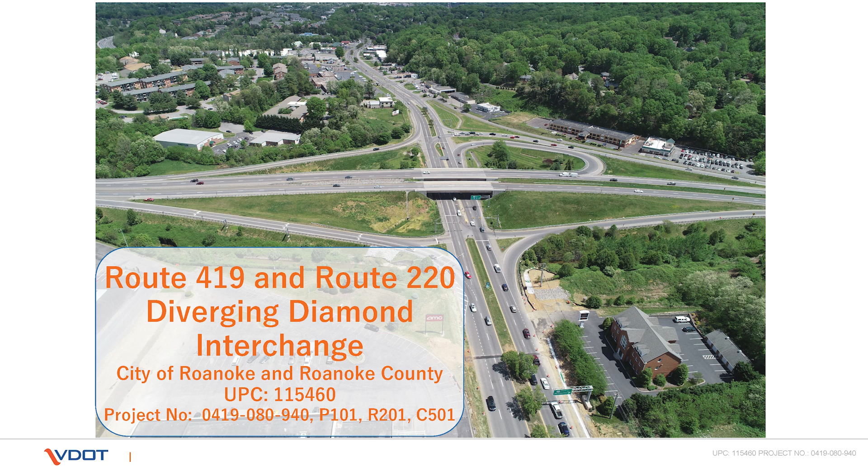Given the unique circumstances of the COVID-19 outbreak, along with our commitment to protecting public health during this national emergency, VDOT is conducting this virtual design public hearing to avoid in-person contact. This presentation will cover the same information that Salem District staff would have shared during an in-person hearing. However, the comment process will be different. Details on how to submit your comments and have your questions addressed will be covered later in this presentation. All project information can be found on VDOT's website.

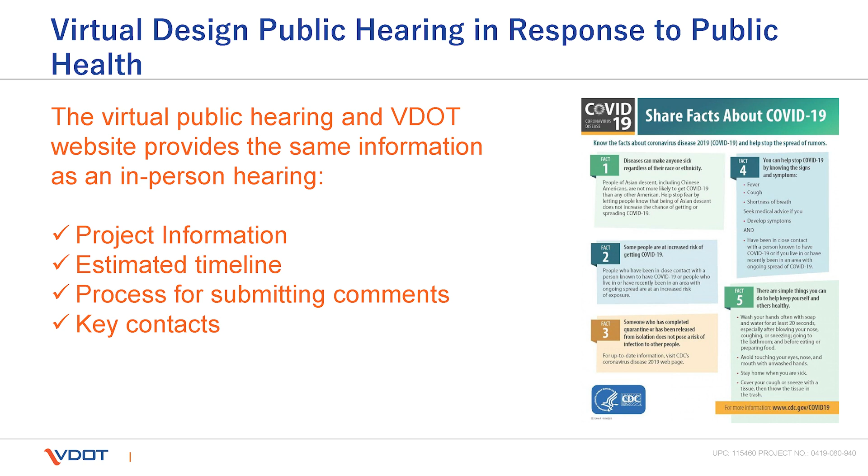Before we continue with the hearing, we want to review some guidelines so everyone can participate and get the most out of this hearing. Attendees will be muted throughout the duration of the hearing to minimize background noise and to ensure that all participants can hear. WebEx participants will have an opportunity to ask questions using the chat feature at the end of this presentation. When the chat feature is on, all WebEx participants will be able to see all messages.

We ask that only questions be written into the chat. The chat feature should not be used for any other type of commentary during the hearing. The moderator will read the questions aloud and they will be answered. Any individual who does not abide by our ground rules or who submits anything inappropriate will be removed from the meeting.

This public hearing is being held to receive and consider comments for the Route 419 and Route 220 Diverging Diamond Interchange project. You may have attended previous public hearings conducted by VDOT. However, for the benefit of those who have not attended one, we would like to explain why VDOT conducts a public hearing. A public hearing has four essential purposes.

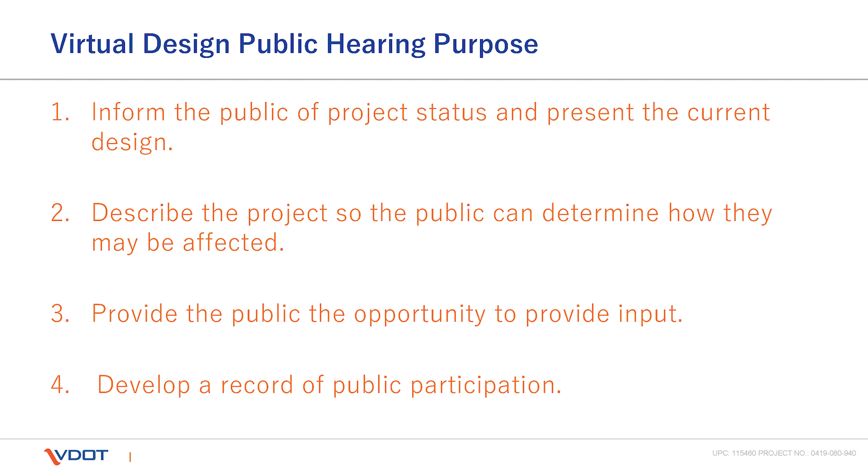First, to inform the public of project status and present the current preliminary design. Second, to describe the project, so citizens can see how they may be affected by the proposed improvements. Third, to provide the public an opportunity to see the proposed improvements and express their views prior to the design being finalized. Fourth, the hearing is also used to develop a record of official public comment to be included as part of the project documentation.

Your comments will be received in three ways. First, you may submit a comment using the email address listed on the screen, which is jesse.weizenfeld@vdot.virginia.gov. That's jesse.weizenfeld@vdot.virginia.gov. Please reference Route 419/220 DDI in the subject line.

Second, comments may also be mailed to the Virginia Department of Transportation, Attention: Jesse Weizenfeld, 731 Harrison Avenue, Salem, Virginia, 24153. Finally, an online comment form is available on the project website, listed on this slide. Comments must be received by July 9th, 2021, to be included as part of the official public hearing record.

While questions asked in the chat feature at the end of the hearing will be answered, these questions will not be included in the official public hearing record. So, if you would like your comments included in the hearing record, please use one of the three methods I just described.

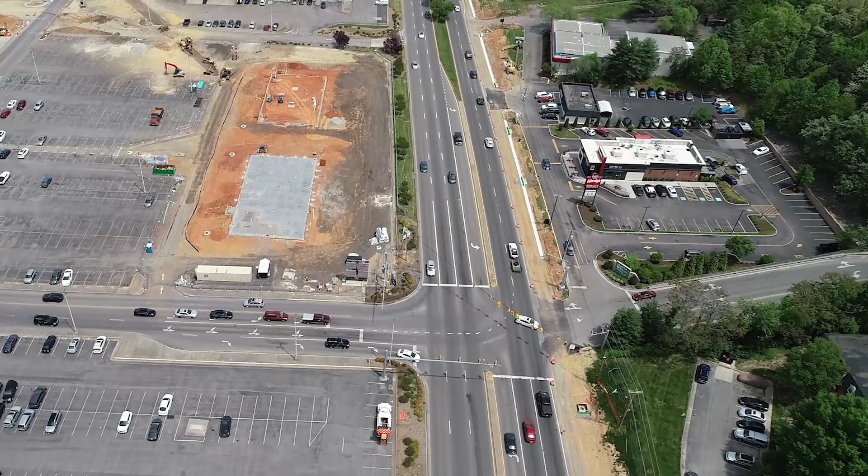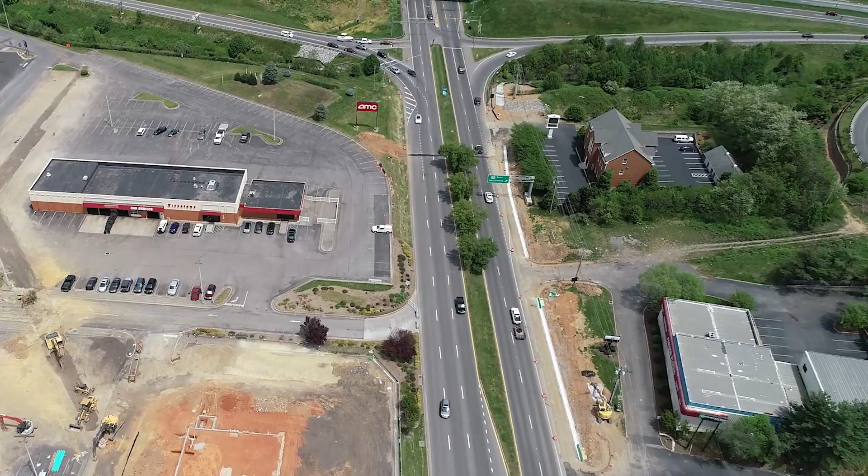Every day, tens of thousands of Roanoke area residents rely on Route 419 and US Route 220 to travel to work, school, and other activities. Route 419, also known as Electric Road, currently carries approximately 40,000 vehicles per day in this area, with Route 220 serving 52,000 vehicles per day. The Route 419 corridor and the Tanglewood Mall area have historically served as a commercial, social, and cultural center for the communities in southern Roanoke County and the city of Roanoke.

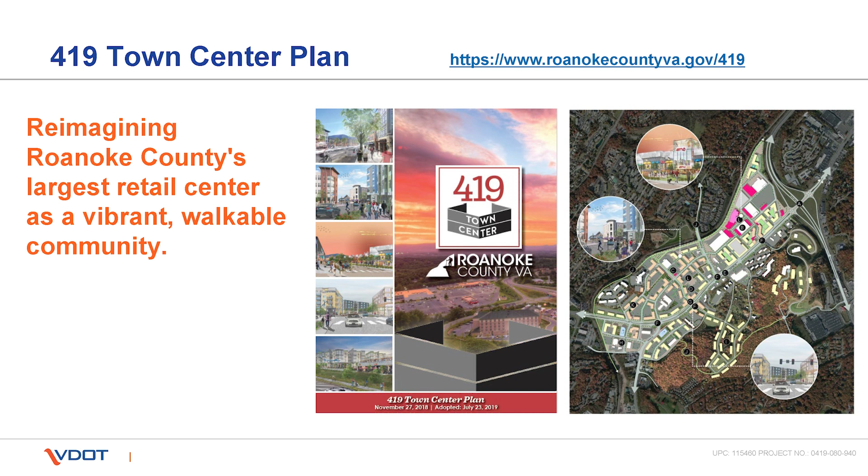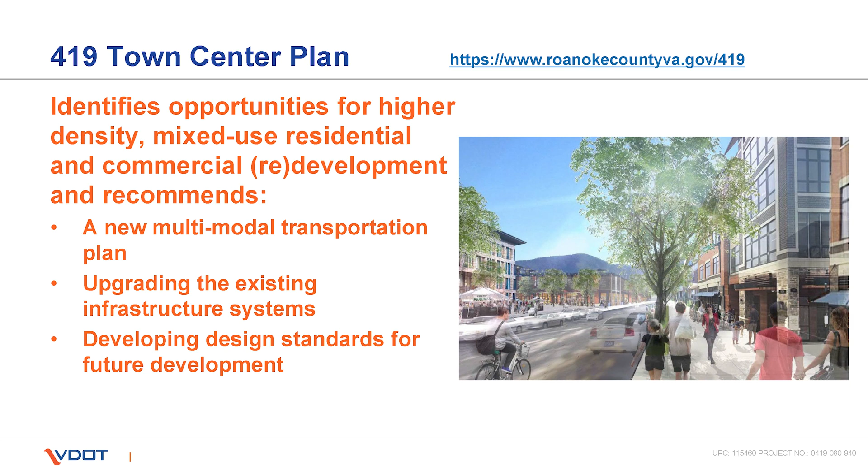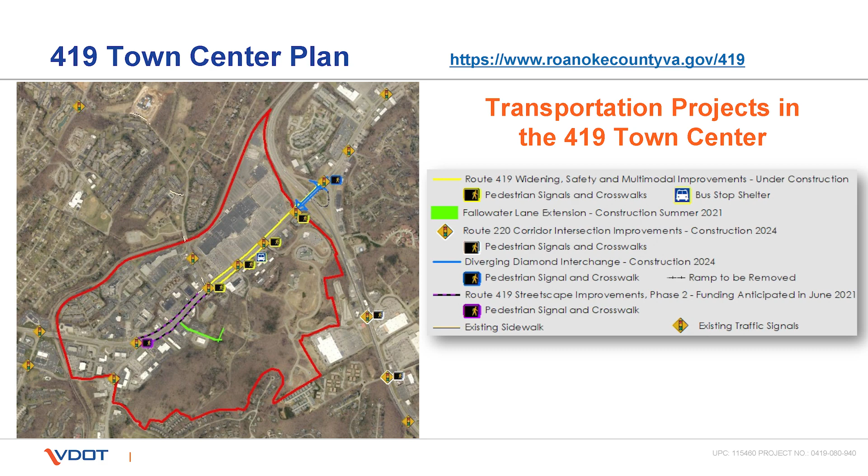County planners have completed a planning study called the 419 Town Center Plan, adopted by the Board of Supervisors in 2019 to set a foundation for reinventing this area by improving connectivity and walkability while supporting mixed-use redevelopment. Roadway improvements to enhance traffic flow and safety on the Route 419 corridor are just one component of the county's future vision. More information about Roanoke County's 419 Town Center Plan can be found on the county's website at roanokecountyva.gov/419.

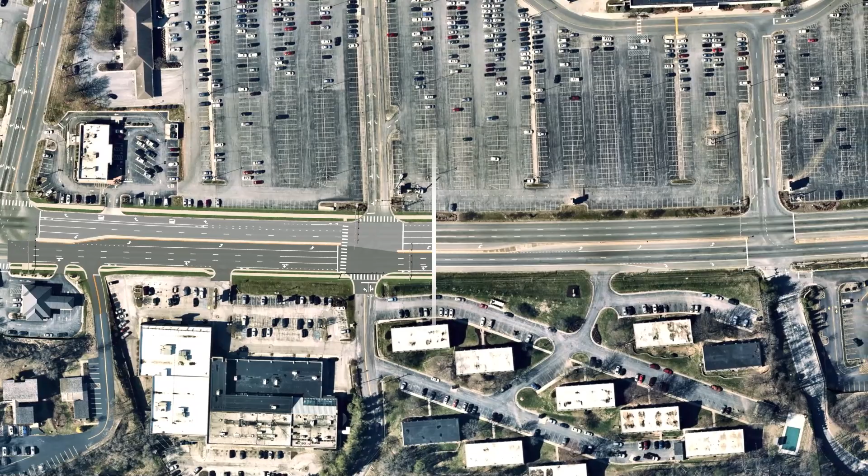Before we discuss the Route 419 and Route 220 Diverging Diamond Interchange project that is the focus of this public hearing, we want to briefly share some information about two other projects along the Route 419 and Route 220 corridors. VDOT, working closely with Roanoke County, is constructing a project to improve approximately 0.4 of a mile of Route 419 approaching the Route 220 interchange. This project, currently being built in front of Tanglewood Mall, will provide a third eastbound lane along Route 419, as well as sidewalks and bicycle lanes in the area in between Ogden Road and the ramps to Route 220. Work is anticipated to be completed later this year.

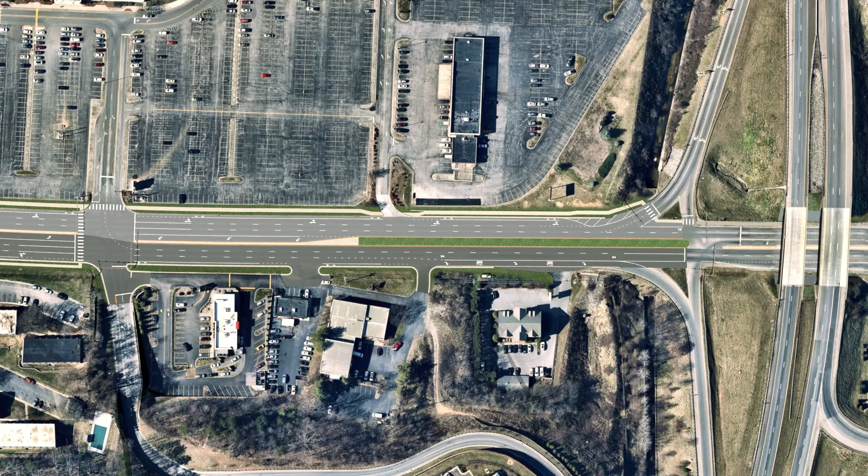Another project that VDOT has been developing is the Route 220 corridor intersection improvements. To achieve the maximum benefit from the future Diverging Diamond interchange at the junction of Route 419 and Route 220, improvements at the adjacent signalized intersections on both these corridors are needed. The Route 220 corridor intersection project will improve 7 signalized intersections along Route 220 between Roanoke and Martinsville, including 2 intersections in the city of Roanoke and Roanoke County at Valley Avenue and Southern Hills Drive, and at Crossbow Circle and Pheasant Ridge Road. This project is intended to reduce congestion and enhance traffic flow and safety through the interchange area and along the entire Route 220 corridor.

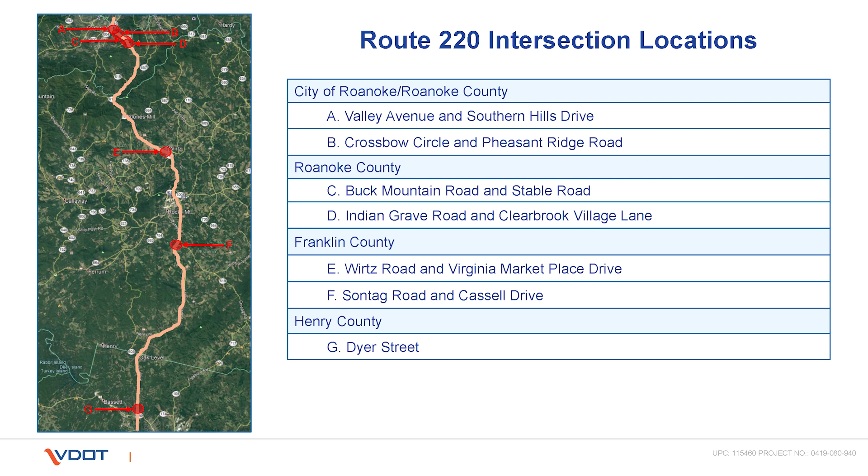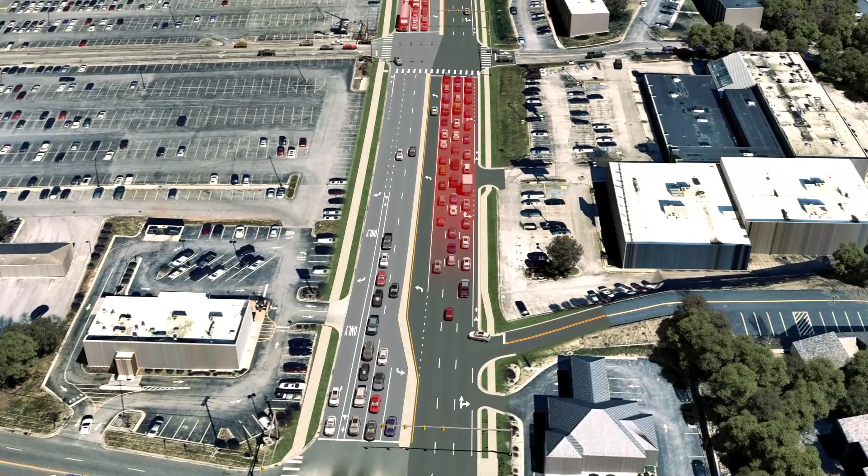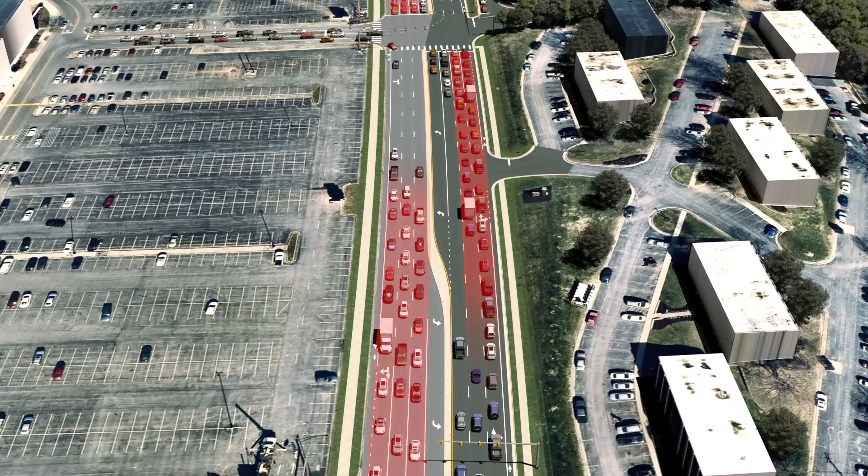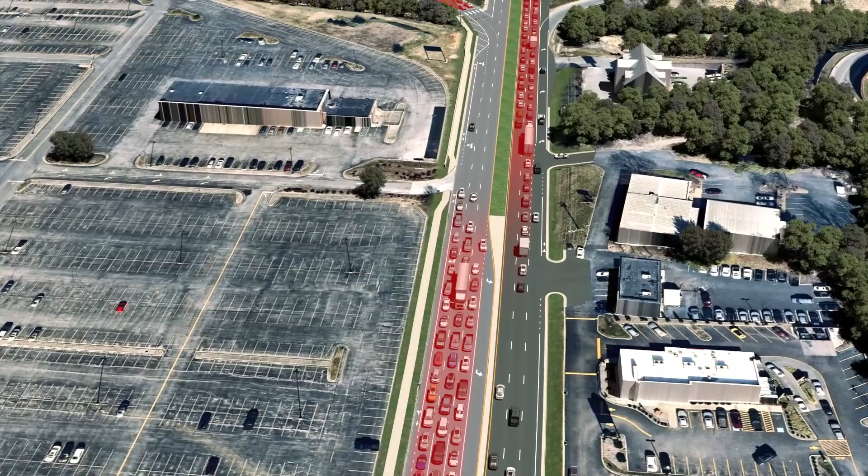A public hearing on the Route 220 corridor intersection improvements was held in April 2021, and construction is tentatively scheduled to begin in 2024. Now we will discuss the project background, project purpose, and details of the proposed Diverging Diamond interchange improvements at the junction of Route 419 and Route 220. Even with the construction project underway on Route 419 in front of Tanglewood Mall, additional improvements are needed to serve current and future traffic demands. The extensive delays and congestion that occur along Route 419 during the peak hours will worsen in the future without improvements. There are particular challenges at the signalized intersections of Route 419 and South Peak Boulevard. Also, the Route 419 and Route 220 interchange will continue to experience congestion with traffic backing up the ramps onto Route 220, particularly during peak travel times.

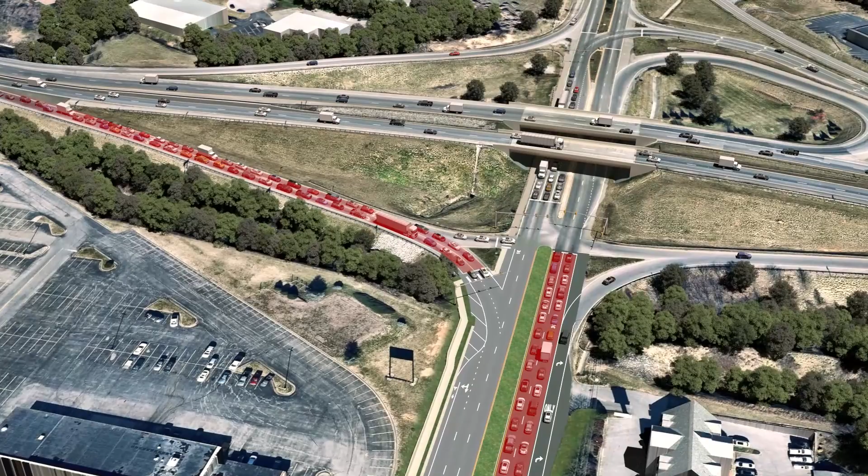To address these issues, improvements to the Route 419 and Route 220 interchange were initially recommended in 2017 as part of the 419 Town Center Plan community engagement. The plan was adopted by the Roanoke County Board of Supervisors in 2019. Reconfiguring the interchange at Route 419 and Route 220 as a Diverging Diamond Interchange, or DDI, was identified as the best solution to reduce congestion and improve traffic flow. There are several benefits of the DDI design, such as improved safety. DDIs reduce the number of points where vehicles may cross paths, which decreases the potential for crashes.

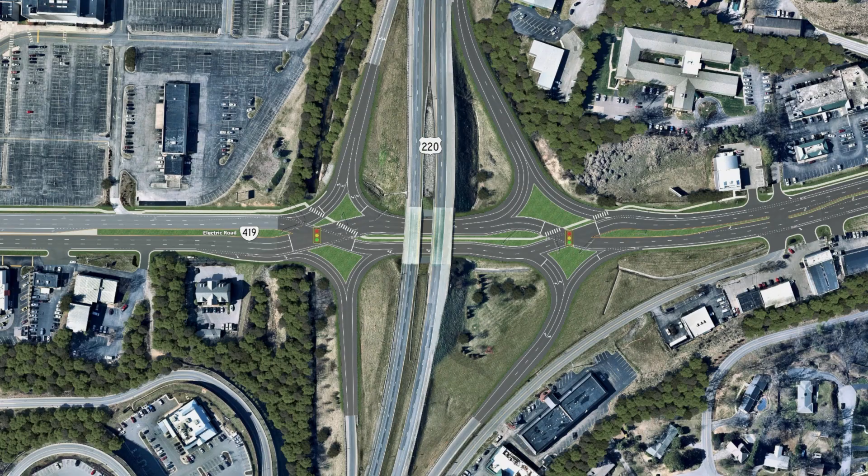Increased efficiency. The crossover intersections at a DDI operate with fewer traffic signal phases, which allows the interchange to handle a greater volume of traffic, operate with less delay than conventional interchange types, and better accommodate pedestrian traffic. Reduced footprint. The proposed DDI configuration requires less space than other interchange configurations, reducing right-of-way needs and impacts to adjacent properties. Motorists who use the I-581 interchange at Valley View Mall in Roanoke will be familiar with the Diverging Diamond concept and its benefits. The diverging diamond interchange would consist of two signalized intersections where Route 419 traffic temporarily crosses to the opposite side of the road. Drivers simply follow their lanes and the traffic signals to complete these crossover movements. Signs and pavement markings will help drivers remain in the correct lane as they travel.

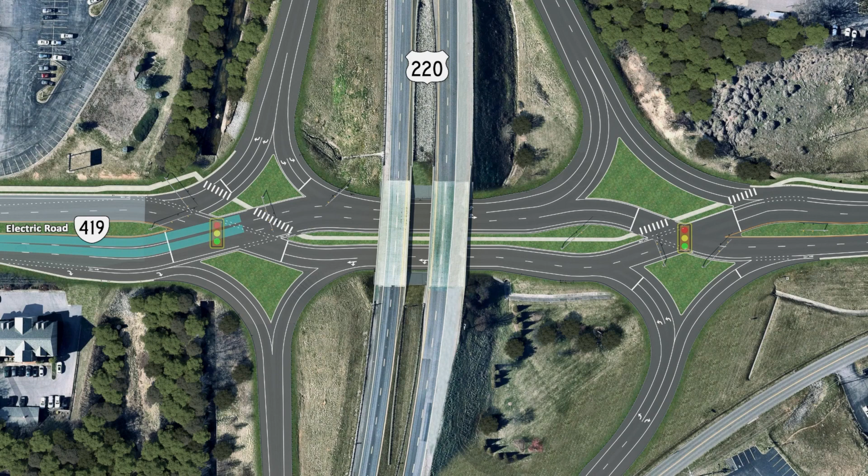So, how would the new interchange function at Route 419 and Route 220? For this discussion, Route 419 is assumed to run east-west, and Route 220 is assumed to run north-south. Approaching from the west, Tanglewood Mall area, along Route 419: traffic destined for Route 220 south towards Rocky Mount would turn right, very similar to how this movement occurs today. Traffic destined for Route 220 northbound towards downtown Roanoke or I-581 would travel through the first crossover intersection onto the opposite side of the road and then exit to the left onto the ramp to Route 220 northbound.

Traffic could access this ramp from either the left or center lanes along Route 419. Traffic continuing along Route 419 would pass through both crossover intersections as shown. If you are traveling to Route 220, the DDI configuration makes it simple to know which lanes to use. If you are turning right, stay in the right lane. If you are turning left, use the left lanes.

Approaching from the east along Electric Road. Traffic destined for Route 220 north towards downtown Roanoke or I-581 would turn right, very similar to how this movement occurs today. Traffic destined for Route 220 southbound towards Rocky Mount would travel through the first crossover intersection and then exit to the left onto the ramp to Route 220 southbound. Traffic would access this ramp from the left lane along Electric Road. Traffic continuing along Route 419 would pass through both crossover intersections as shown.

Southbound traffic approaching from Roanoke along Route 220. Traffic destined for westbound Electric Road towards Tanglewood Mall and Salem will turn right from the dual right turn lanes. This is similar to how the movement is made today. Traffic destined for eastbound Electric Road and Franklin Road towards the city of Roanoke will bear to the left as they proceed down the off-ramp. From there, they will enter Electric Road and pass through the crossover intersection.

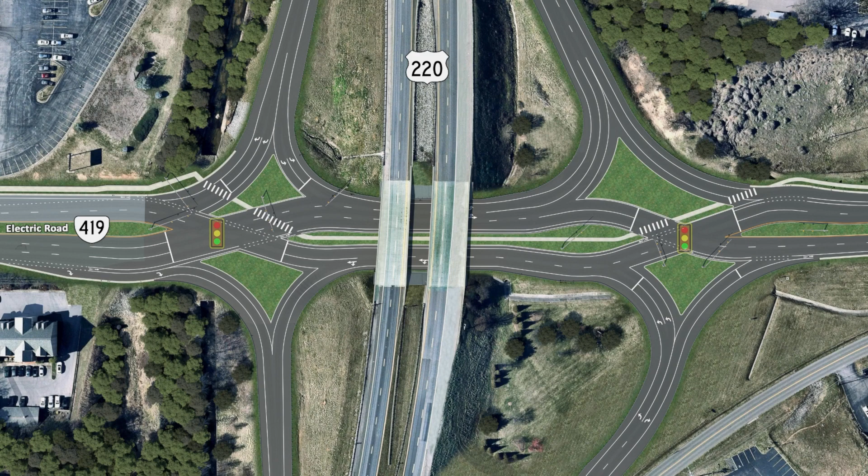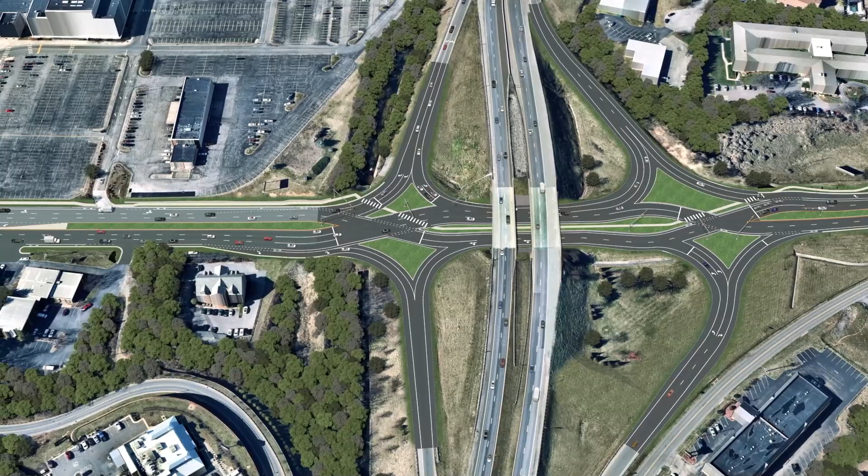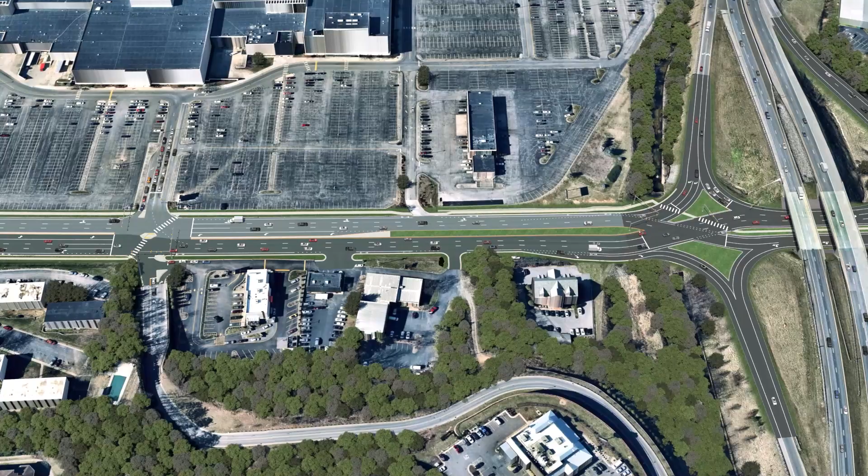While the proposed reconfiguration of the interchange as a DDI will provide safety and operational benefits, additional improvements are needed along Electric Road. Currently, the interchange serves as the bottleneck or choke point along the corridor. Once the interchange is improved, more traffic will be able to pass through it during peak travel times, which would exceed the capacity of the adjacent intersections. The intersections at Ogden Road, Elmview Road, and South Peak Boulevard will need to be modified to operate more efficiently, or they will become the new bottlenecks after the DDI is constructed.

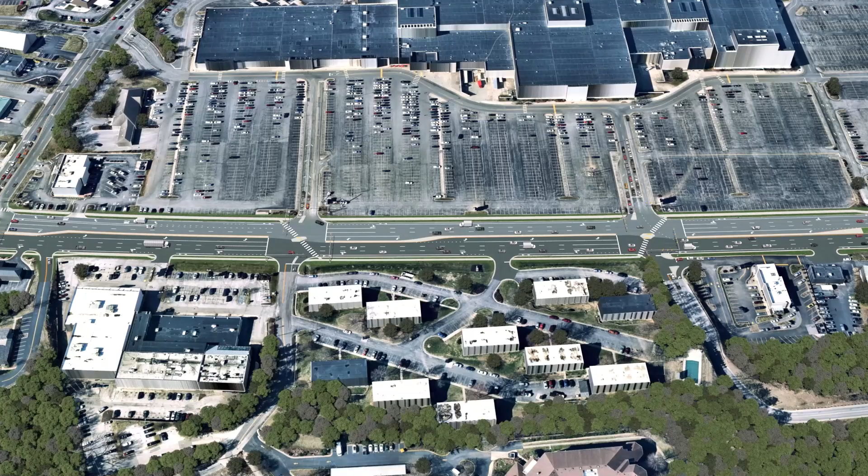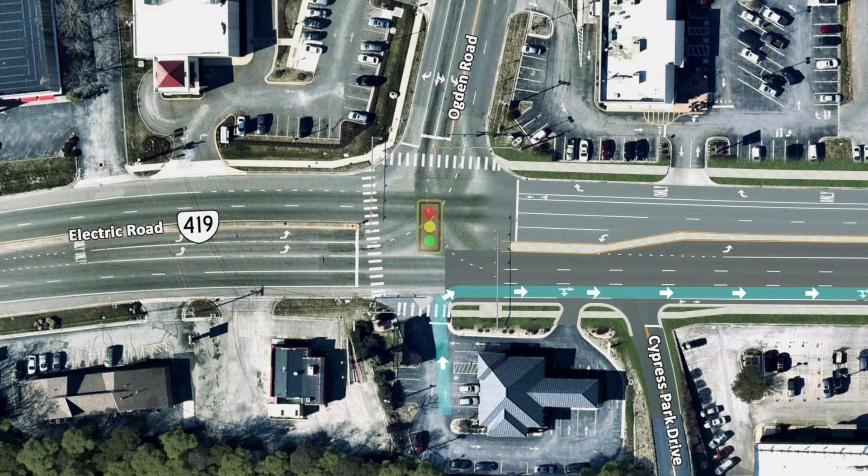At each location, certain low-volume traffic movements will be rerouted, allowing for a reduction in the number of phases at the signal and increasing green time for all other drivers. We will now discuss the modifications at the 3 signalized intersections along the Route 419 corridor. At Ogden Road, traffic exiting the bank from the main entrance will only be allowed to turn right onto Electric Road. Left turns and through movements from this parcel would turn right and then make a U-turn at the adjacent Elmview Road signal.

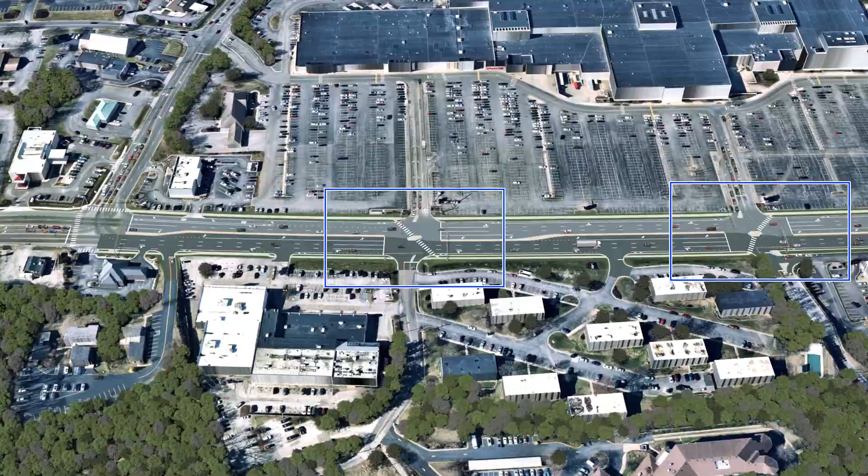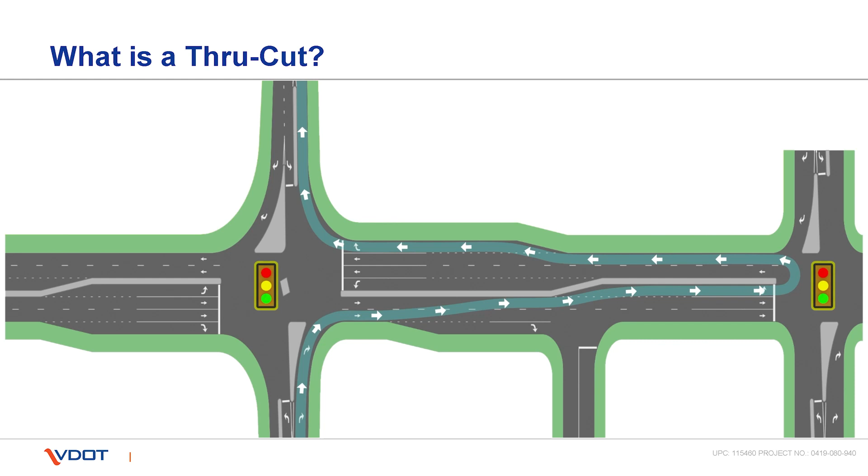At the intersection of Elmview Road and South Peak Boulevard, a thru-cut intersection is proposed. What exactly is a thru-cut? Basically, a thru-cut intersection implements a change for motorists who currently drive straight across Route 419 from a side street at signalized intersections. Instead of driving directly across Route 419, these drivers will turn left or right at the signal and can turn directly into businesses or use a nearby signal to make a U-turn to reach their destinations.

You might ask what's changing with the thru-cut improvements. The thru-cut only reroutes motorists who currently drive straight across Route 419 at a signal. Notably, this is less than 1% of all traffic that uses the intersections in this area. This change eliminates a signal phase. With fewer signal phases, more green time can be provided on Route 419. More green time means less delays for drivers.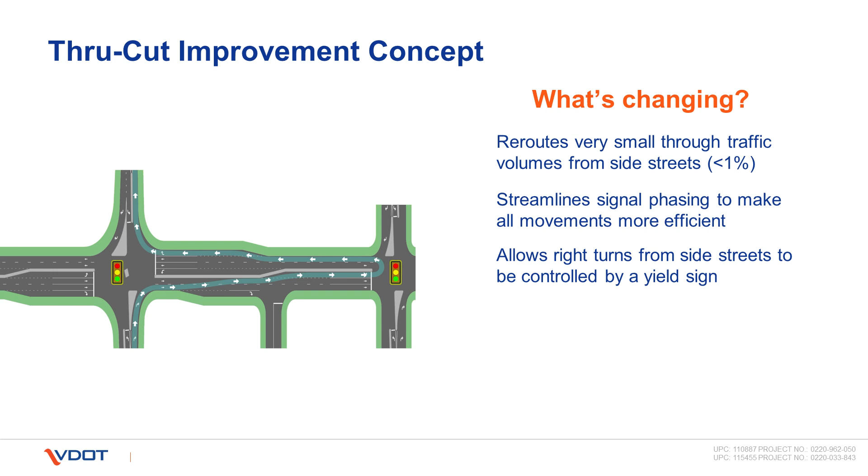In addition, yield signs will be installed to control right turns from the side streets. This will enable cars turning right to proceed whenever a gap in traffic becomes available. Finally, pedestrian accommodations will be provided as needed.

So, what's staying the same? No traffic signals are being removed. Also, drivers can still turn left and right from side streets onto Route 419. And Route 419 motorists can still turn onto side streets or drive eastbound or westbound on Route 419 as they do today.

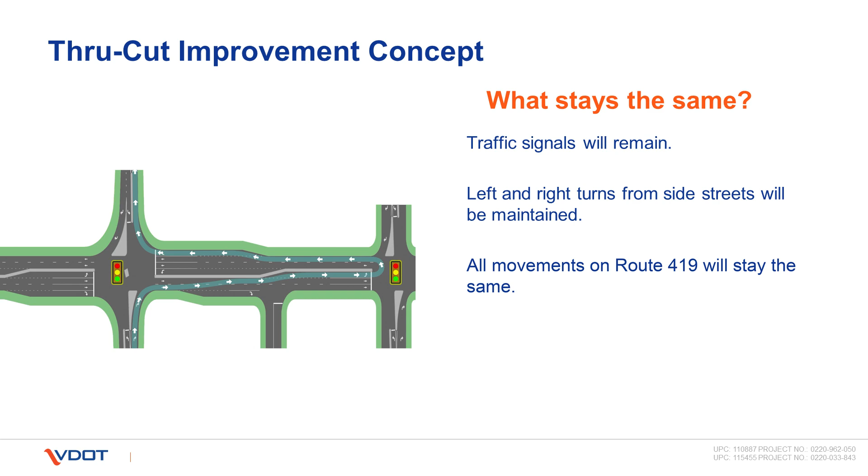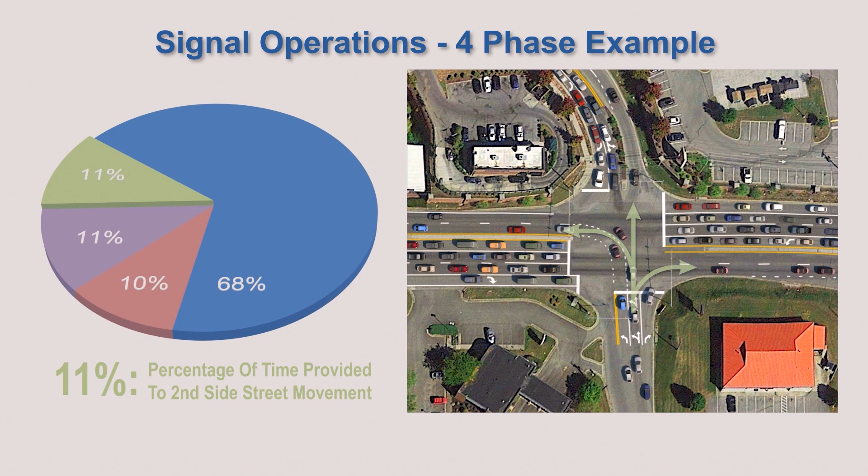This sequence of graphics shows how time is divided between the various signal phases for a typical intersection on a busy corridor. A signal phase serves a movement or group of movements which are allowed to enter the intersection at the same time. Next, you can see how time is divided between the various signal phases with a thru-cut in place. By only requiring 3 signal phases at most intersections, more green time can be provided to higher volume movements at the intersection.

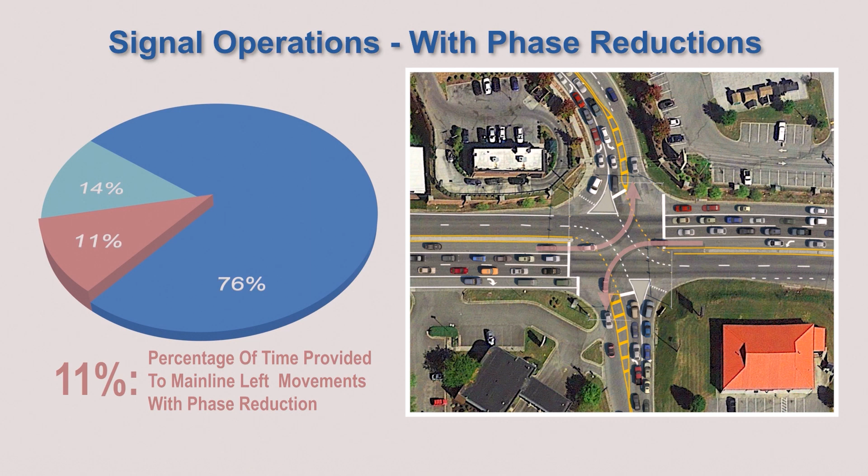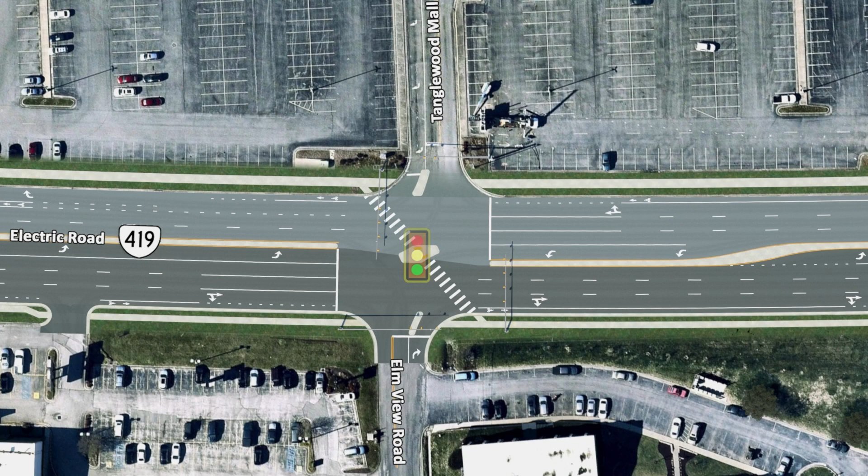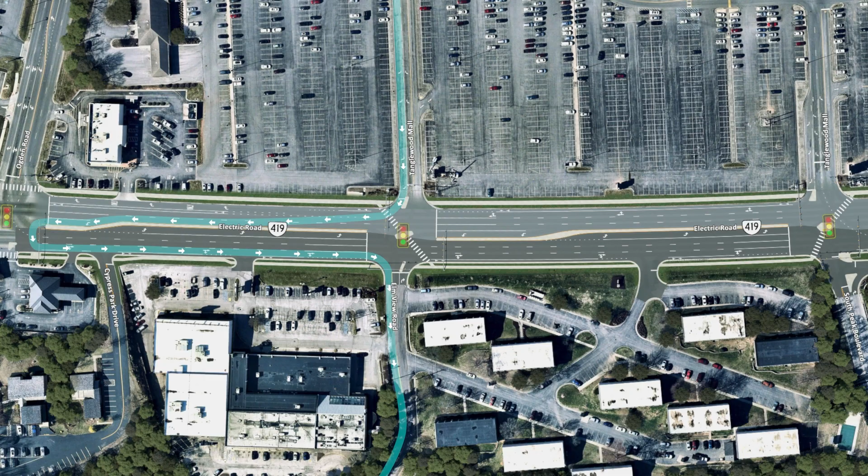At Elm View Road, a thru-cut intersection is proposed. The low-volume through movements from the side streets, in this case Elm View Road and one of the exits from Tanglewood Mall, would be rerouted. To access the mall from Elm View Road, traffic could turn right and then make a left into Tanglewood Mall at the signal at South Peak Boulevard. To access Elm View Road from the mall, traffic could turn right and make a U-turn at Ogden Road or exit the mall opposite South Peak Boulevard and turn left onto Elm View Road.

At South Peak Boulevard, a modified thru-cut is proposed. Traffic wishing to go straight across Electric Road from South Peak Boulevard could turn left and then make a right into Tanglewood Mall at the signal at Elm View Road. Traffic wishing to go straight across Electric Road from Tanglewood Mall could turn right and make a U-turn at Elm View Road or exit the mall opposite Elm View Road and turn right onto South Peak Boulevard. Left and right turns from Tanglewood Mall would be allowed.

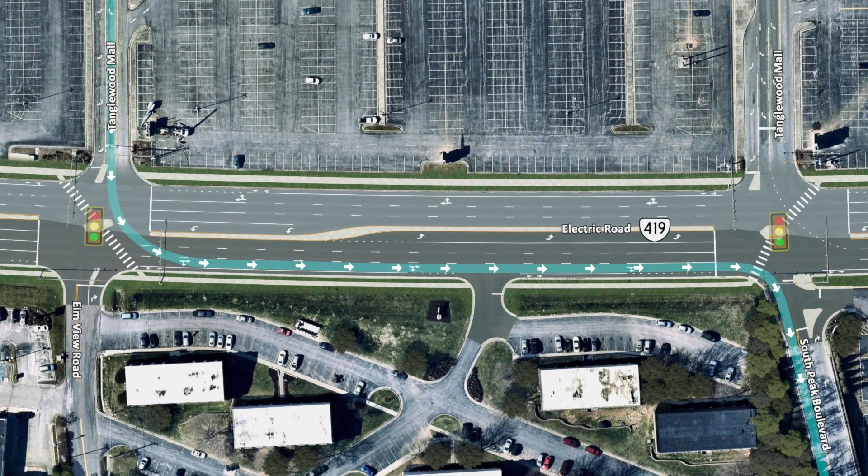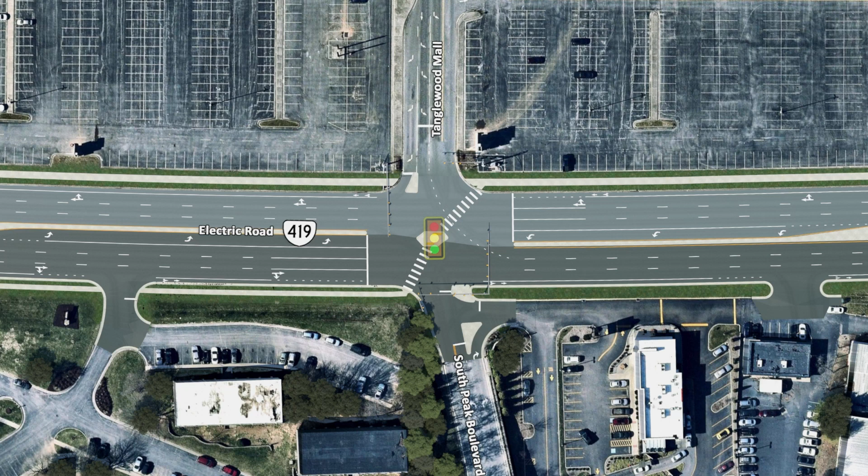Along South Peak Boulevard, left turns would be allowed onto Electric Road. Traffic from South Peak Boulevard destined for Electric Road and the Route 220 interchange would no longer be able to turn right at the traffic light. Other options are available to make this movement, such as accessing Route 220 from South Peak Boulevard and Valley Avenue. Vehicles would still be able to turn into and out of Wendy's from South Peak Boulevard and Electric Road. The graphics show how the traffic signal at this intersection would operate.

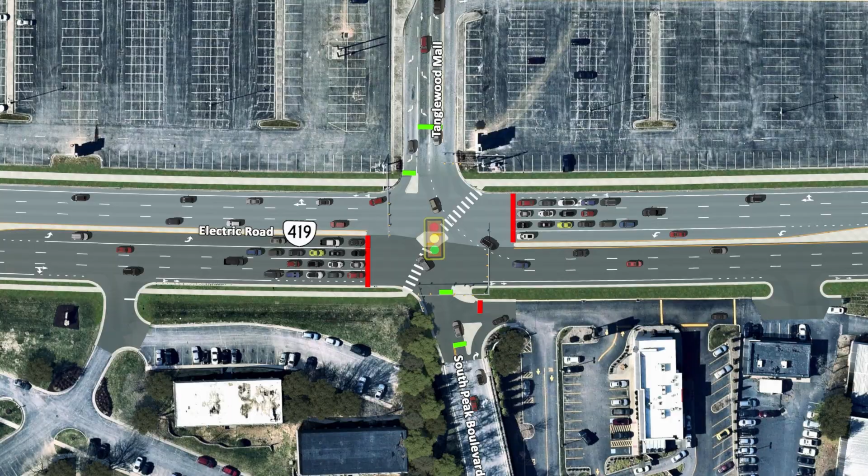The proposed intersection improvements on Route 419, in conjunction with the DDI, will improve the traffic flow and mobility on the entire corridor and provide other benefits. Drivers will experience shorter wait times due to fewer signal phases. Safety is also enhanced because the number of rear-end collisions is reduced by decreasing stop-and-go traffic. Crashes may be reduced by as much as 15 to 20%.

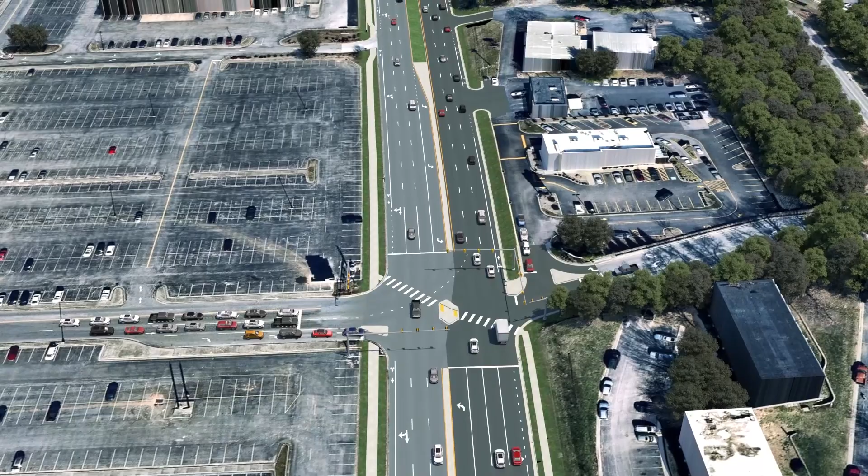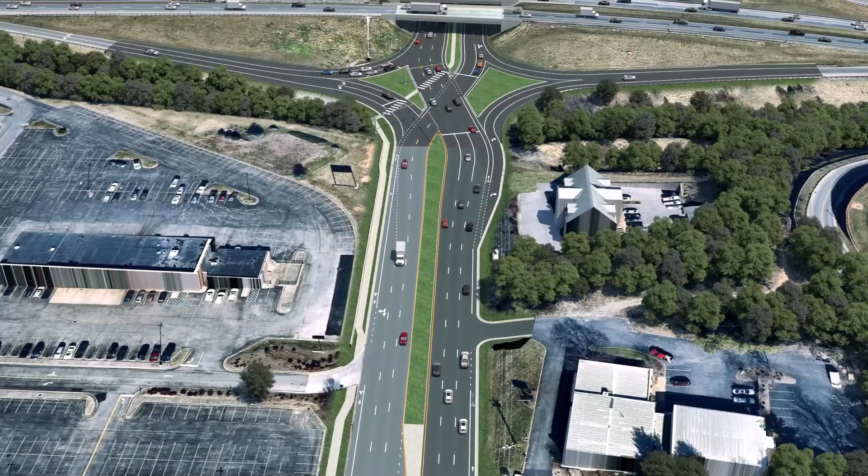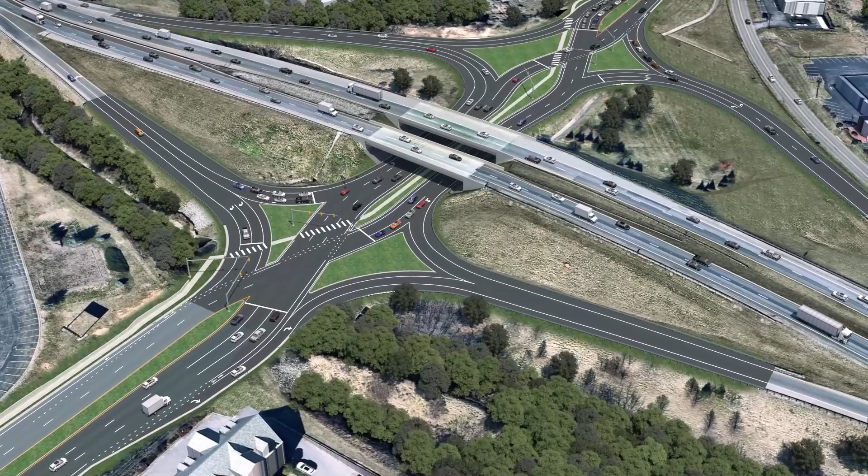The thru-cut design also improves the corridor at a cost that is significantly less than traditional widening. In addition, these improvements would provide opportunities to enhance pedestrian safety by adding new crosswalks and other features at some locations. Without these improvements, traffic congestion is expected to constrain future growth and travel along Route 419 and Route 220.

Now let's discuss the project schedule. Preliminary engineering is underway. After the public hearing, we will receive comments until July 9th, 2021. VDOT expects to begin acquiring the necessary right-of-way and easements for this project in early 2023. In early 2024, the project will be advertised for contractors to submit bids for construction.

Once bids have been received and the lowest qualified bidder is identified, construction is tentatively expected to begin in mid-2024 and be completed in late 2026. The total anticipated cost for this project is $17.5 million. This includes preliminary engineering, right-of-way, and construction costs.

This project is funded with federal and state funds. During construction, there will be impacts to traffic, but we're working to minimize the disruptions as much as possible. 2 lanes of traffic in each direction will be maintained during peak traffic hours throughout the duration of the project.

Drivers can expect temporary lane closures outside of peak travel times, as well as the potential for narrowed travel lanes, lane shifts, and shoulder closures. Turning movements may be redirected at times during construction, but access to businesses will still be available.

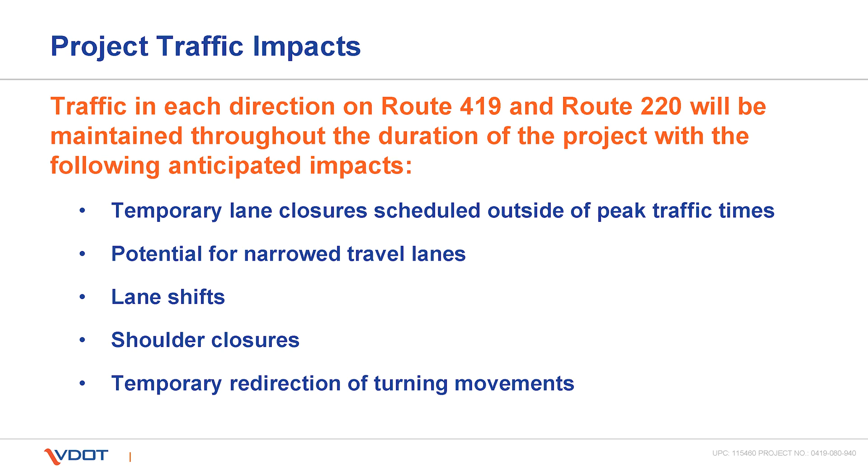This project has been evaluated for potential environmental impacts in accordance with the National Environmental Policy Act of 1969. The NEPA Act is an umbrella encompassing a variety of legislation passed over the years aimed at protecting air and water quality, archaeological and historical assets, reducing noise, and numerous other issues.

Through the evaluation, it was determined that the project will not individually or cumulatively have significant environmental impacts that would require an environmental assessment or an environmental impact statement. Therefore, the project qualifies for a programmatic categorical exclusion level of NEPA documentation under federal regulations.

The programmatic categorical exclusion was approved by the Federal Highway Administration in March of 2021 and is available on the project website. Next, we'll provide you with some information regarding the anticipated right-of-way impacts for this project.

There will be less than an acre of proposed right-of-way needed for the project, with no businesses, residents, or nonprofit organizations being displaced. The right-of-way will be acquired from multiple properties along the project corridor and on either side of Route 419. This will include permanent and temporary easements for construction, stormwater facilities, and utilities.

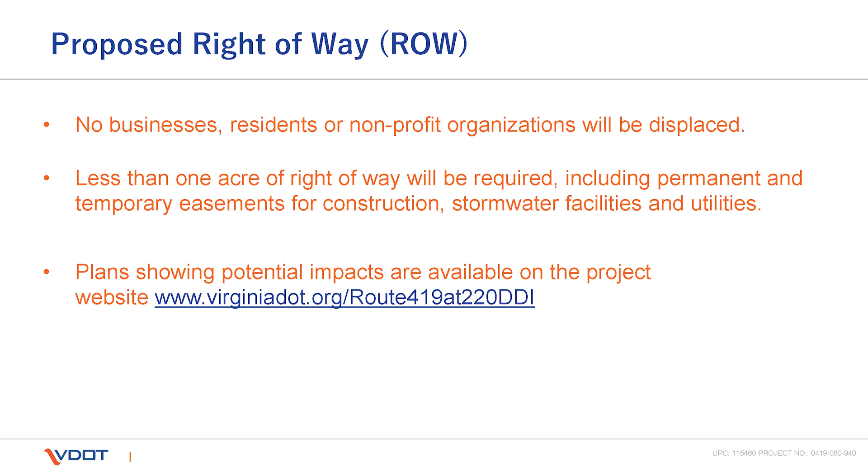All right-of-way acquisitions will be completed in accordance with the Uniform Relocation Assistance and Real Property Acquisition Policies Act of 1970 as amended in 1987. To see specific locations of proposed right-of-way impacts, please visit the project website and view the right-of-way data sheet and plan sheets. This is the preliminary right-of-way data sheet that is available on the project website.

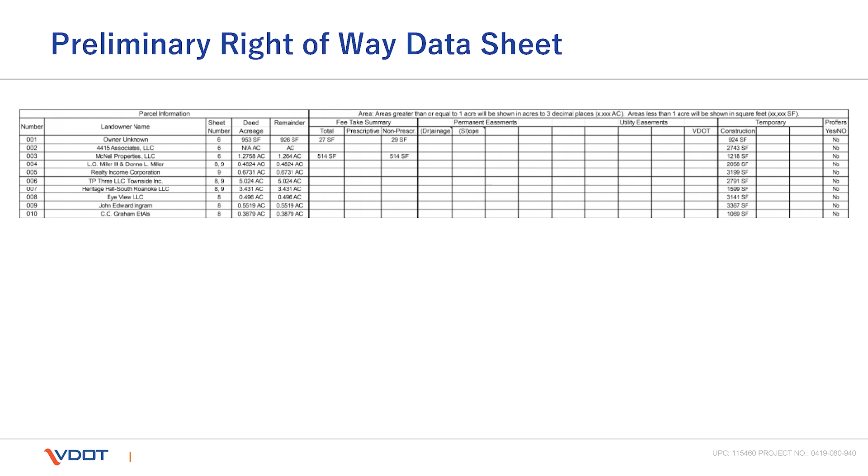This sheet lists all the right-of-way impacts that were identified during the preliminary design phase. As design on the project progresses, these proposed right-of-way impacts may be adjusted as necessary to accommodate the final design. The property owners will be informed of the property impacts and easements during the right-of-way acquisition process prior to construction.

The acquisition of necessary rights-of-way for this project will follow federal and state laws and VDOT policies and procedures. The Uniform Relocation Assistance and Real Property Acquisition Policy Act of 1970, known as the Uniform Act, is the federal law that is followed for appraisals, negotiations, and relocations of families and businesses.

Each property will undergo a valuation process to determine the fair market value for each acquisition. The right-of-way negotiator will communicate with the landowner to answer questions and complete this process. For more information about right-of-way acquisition, please reference VDOT's brochure entitled Right-of-Way and Utilities, a guide for property owners and tenants. The brochure is available on VDOT's website. That concludes the detailed information about the project.